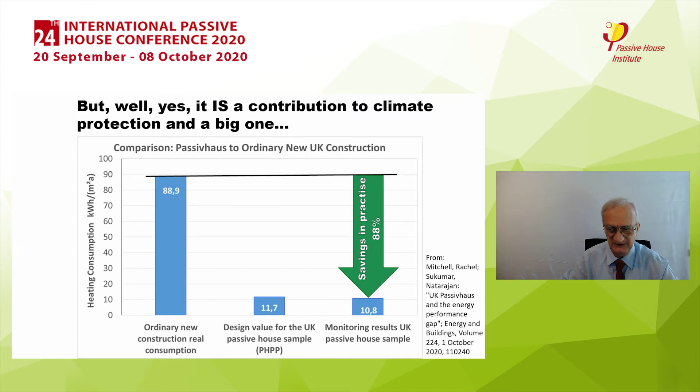This is not just a contribution to climate protection, but of course it is a big one. As we see from one of the latest studies on the achievements of Passive House, it's about 90% reduction in the energy needs for a typical residential building. This is from the latest UK study, but if we look at the general results of a lot of passive houses built in past decades, we can see that compared to contemporary average consumption, the reduction in heating energy is more than 90%.

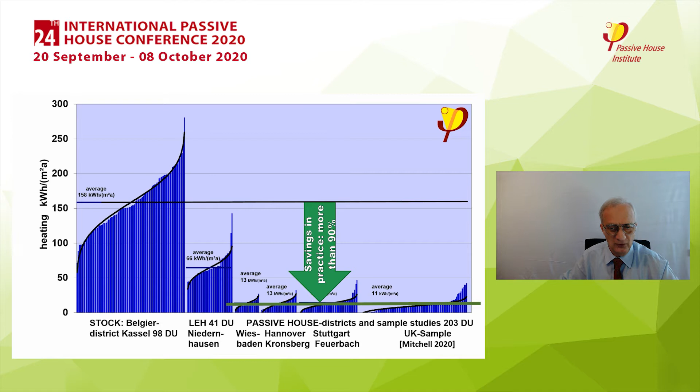And we have to keep in mind, heating contributes 30% of global energy consumption. So this is a huge reduction potential for energy and at the same time for the carbon dioxide emitted by using these furnaces for heating.

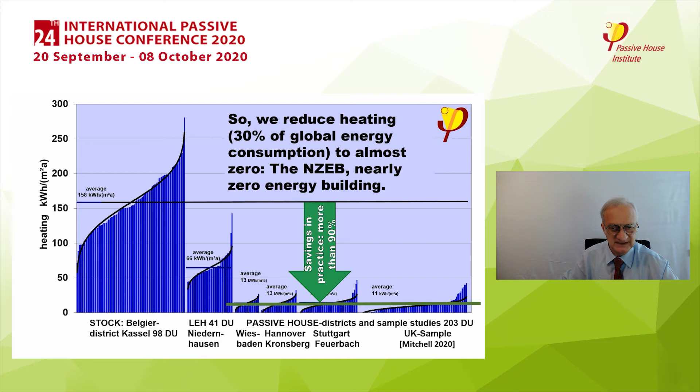Now, for a passive house, these demands for heating energy are quite low, so we can manage with a little bit of seasonal storage. But seasonal storage is something which is quite expensive, so we don't want to do much of this, and that will also be the case in the future.

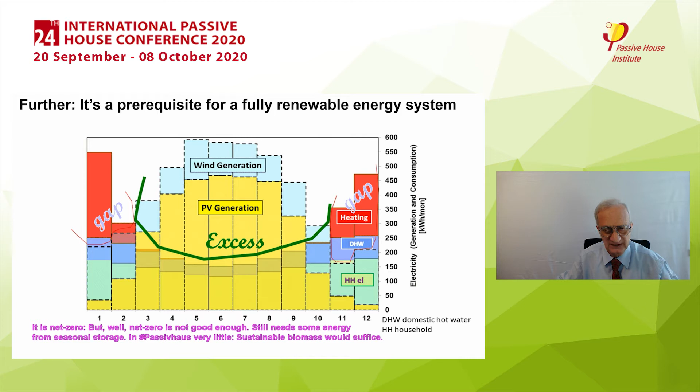So using passive house technology, we can improve the amount of energy efficiency we add to what we have already done in the past. That was quite a lot, but we can do even more so that the overall primary energy demand will not be increasing, but can be decreasing in the near future.

This is the additional efficiency we need when we add renewable energy, which can grow at least as fast as conventional energy production has grown in past decades, so that in a range of 2, 3, 4 decades, we can reduce all the fossil energy we need for the energy services in our houses, for our traffic, and for all the other purposes, which are of course also important.

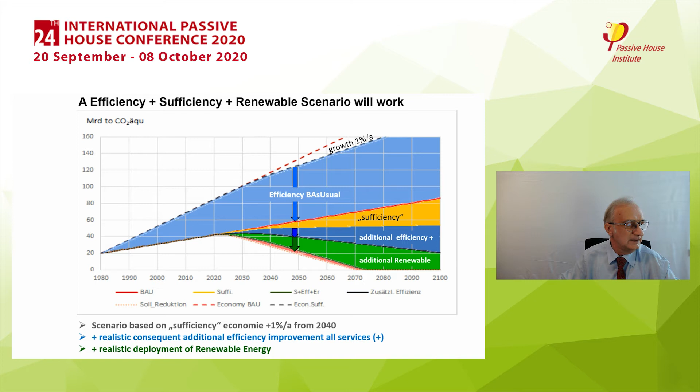So this is where I also have to look for the other advantages which a passive house will deliver for us. And first of all, if I'm sitting in my building, I want it to be healthy. So we want healthy living, and the passive house can deliver that.

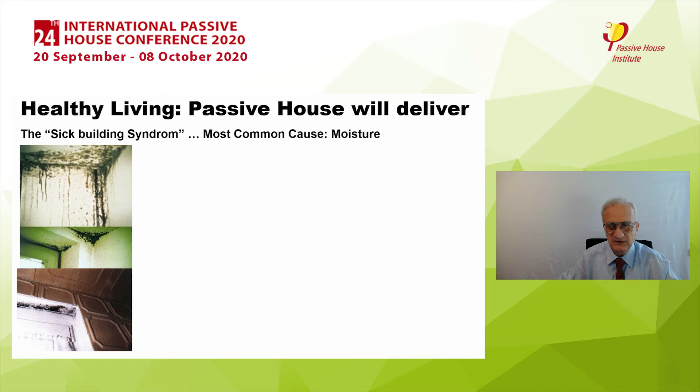If you look at buildings which are not healthy, like these ones, most of the causes for this are moisture problems. We don't want to have that in passive houses, and we won't.

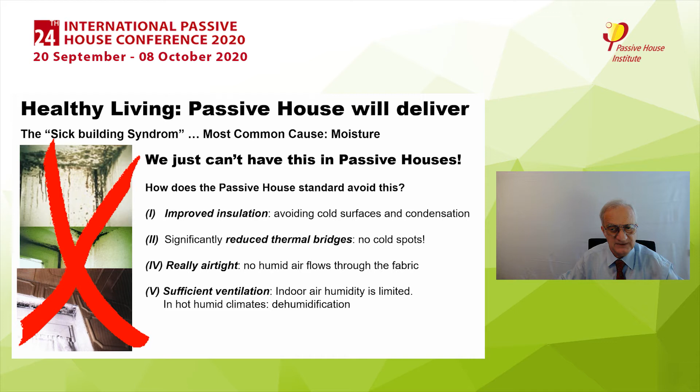Now, how does the passive house standard avoid this? Well, it has improved insulation, reduced thermal bridging, and it is really airtight, so there is no condensation in the gaps. And we have sufficient ventilation, which is very important with respect to indoor air quality.

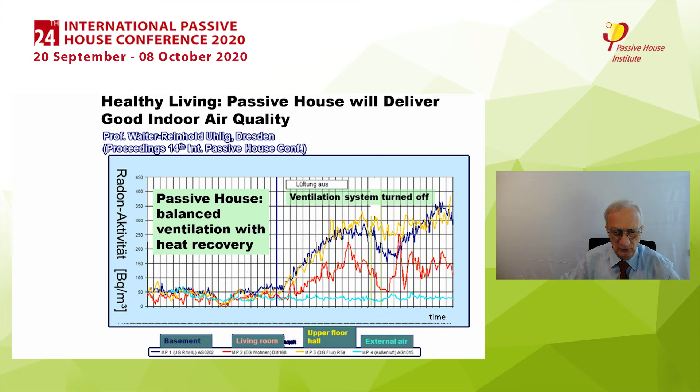This is also the case, of course, for all the other contaminants in buildings. In the past half year, we have all been confronted with the COVID-19 pandemic, and we now know that COVID-19 is also spread through aerosols. These aerosols are small particles in the air which can remain there for quite a long time; it takes about 3 hours to breathe just half of what was there before. So it's quite important to have fresh air all the time, and that is exactly what the passive house can deliver.

This is what we can see in schools, for example. Of course, we have to make sure everybody is also wearing a mask, because the big droplets, which might fly just a few meters and hit your face or surfaces, can't be ventilated out. You have to be protected from them by a mask. But if you're wearing a mask, the aerosol can be avoided by passive house ventilation, and this is what you see on that slide.

So we will reduce the overall chance of getting infected by more than a factor of 3, and that means that at the end the infection will die out because the reproduction rate will be smaller than 1.

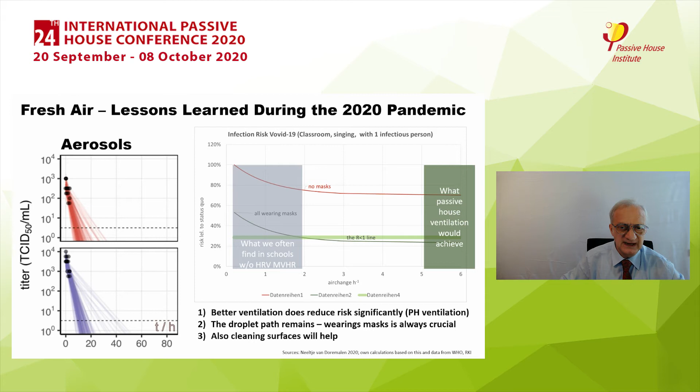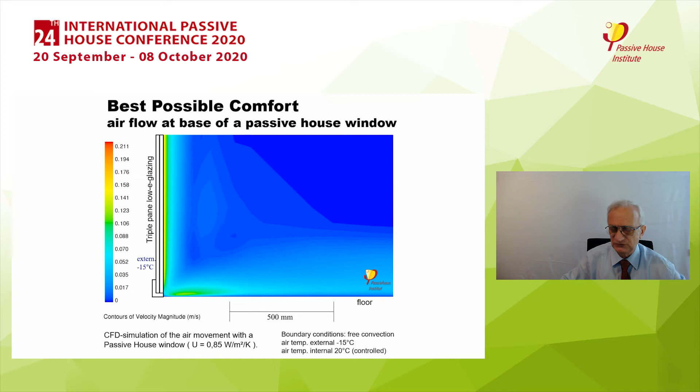So it's not just a healthy building, it's also a comfortable building, which the passive house will definitely be delivering. This is what you see on the next slide: the best possible comfort we can have. This is the cold draft which could come down from the window.

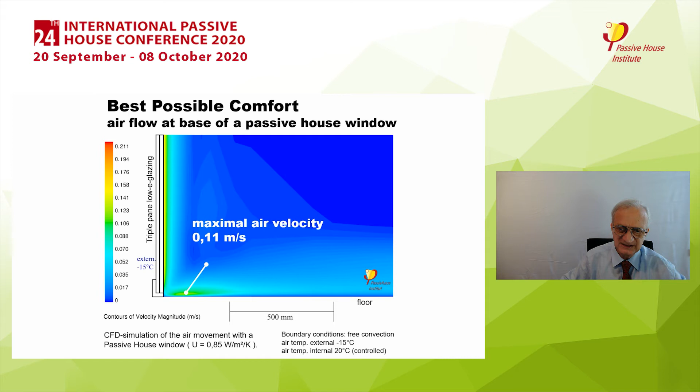In normal buildings, the velocities can be up to half a meter per second, and it could be quite cold air coming down there. In a passive house, we have very well insulating windows so that the surface temperatures are always above 17.5, 18 degrees.

You can also see this on this slide, where we see a visible picture on the left-hand side and a thermographic view on the right. With a single pane or double pane window, we still have cold window surfaces on the inside. But with the passive house window, the triple pane, double low-E window, the surface temperatures are above 17.5, 18 degrees. So at the end, there are no differences in radiation temperatures, no cold surfaces, and no downdraft at all.

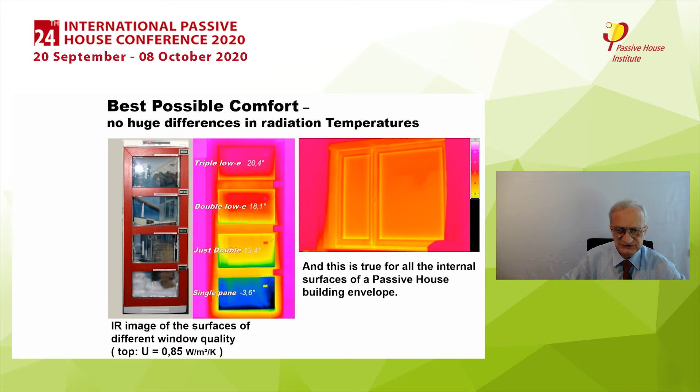This is also the case in the dwellings themselves. The surface temperatures of the external walls are even higher than that. We have structural protection by the air tightness, by being free of thermal bridges, by having relative humidities that can be guaranteed to be below 60%, by avoiding temperature stress in the construction.

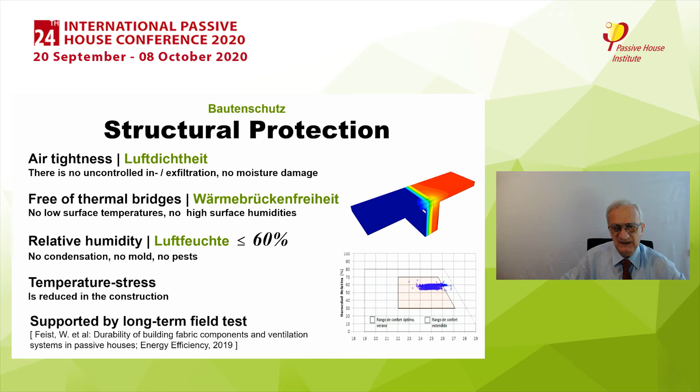And we have the corroboration of that by the long-term field test, which has just been published after looking into the data from 25 years of the passive house Darmstadt-Kranichstein, where we have done scientific research on how this building behaves right now.

The next quite important point is that the passive house can be affordable housing. To be a solution to mitigate climate change, it has to be affordable, because it's much too expensive otherwise—nobody will be able to do that in these 25 to 35 years we have for tackling climate change.

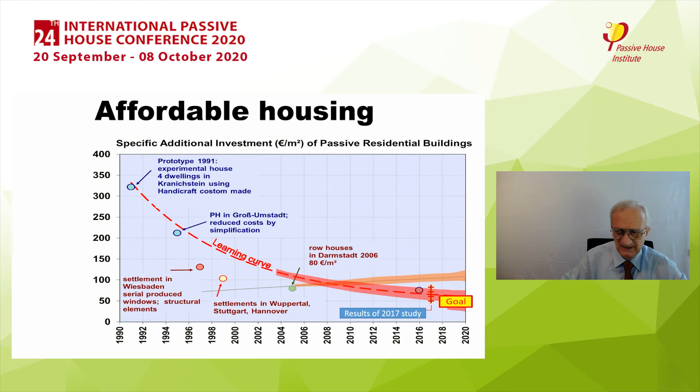So the passive house will pay back through the energy savings, even with a very low cost of fossil energy. And we already have built examples which show that this is not just theory, this is really working.

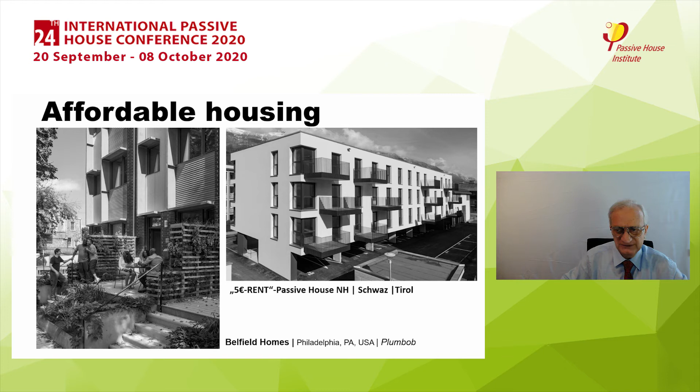We have feedback from a lot of places. This is from Australia, showing that the overall cost of living in a passive house, including all the advantages we have been talking about, will be lower than the costs in ordinary buildings. We will also see this in some of the presentations given at this conference.

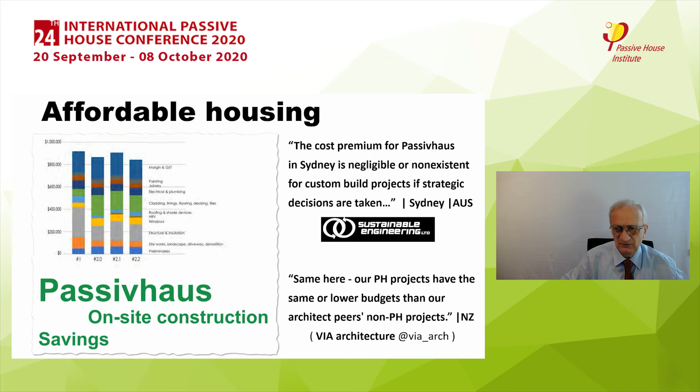This is important because if the heating costs are lower than €300 or dollars per year, it means that the energy costs for the passive house component investment are in a range between 0 and 6 cents per kilowatt hour. This is much cheaper than any kind of final energy you can have from whatever source you want—even less expensive than cheap fossil fuel energy.

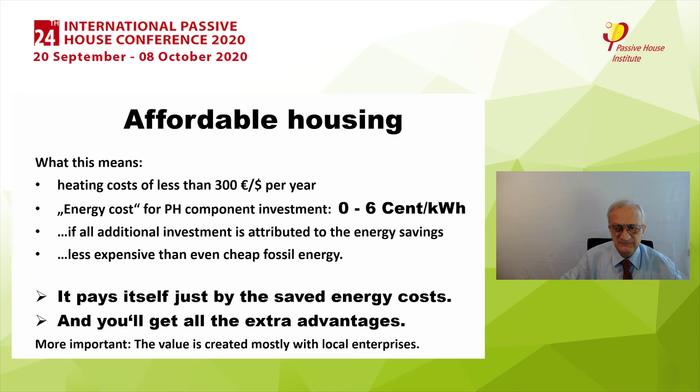So the passive house pays for itself just through the saved energy costs, and you get all the other advantages we have been talking about. What's even more important is that there's value created by building passive houses or by doing EnerPHit retrofits, and this value is mainly created with local enterprises. This is the next thing I'm going to speak about.

So this is a contribution to sustainability, and it's mitigating climate change. We have the problem of extinction of natural species. We have the danger of global wars, especially waged with nuclear or biological weapons. We have water pollution. And we have a shortage of certain rare earth elements.

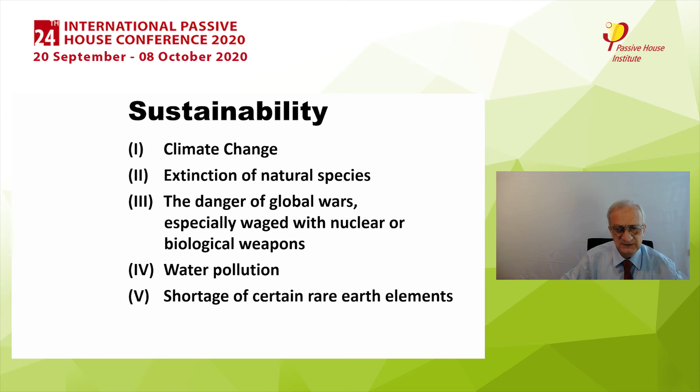In the contribution to the proceedings, I will come back to these topics with respect to some of our examples at the conference. Passive houses also have quite high resilience with respect to the climate change which will already occur in the near future.

What you see here is the final energy demand over several months in a passive house. Red is the heating, green is the domestic electricity, blue is the domestic hot water, and there's this blue part for cooling, like we have nowadays in not very hot climates.

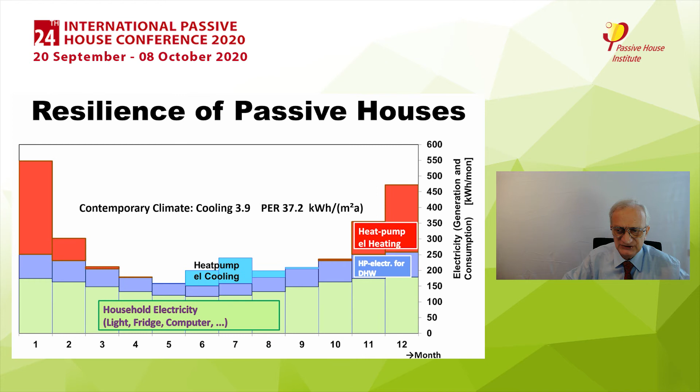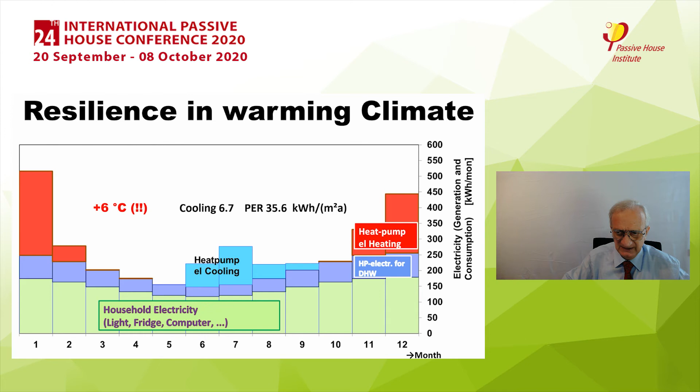But now if the climate is changing, there will of course be an increase in the cooling energy—this is what you see here. On the other side, there's a reduction in heating energy, so that the overall primary energy demand will be even a little bit less than it was before. So the passive house can also work in a warming climate.

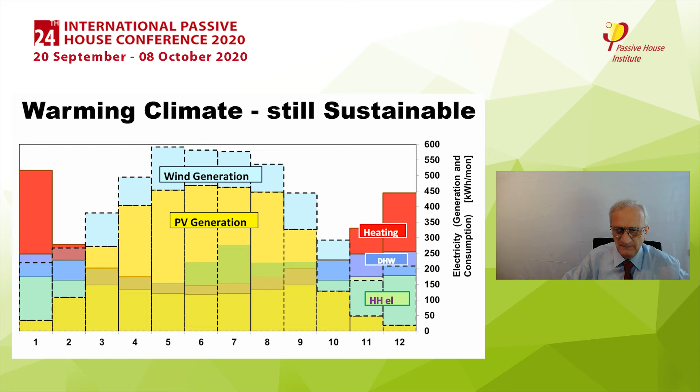If you look at the contribution of solar energy, this is the yellow part—you see that all that extra cooling energy is well within what can be delivered by the photovoltaic system, which can be mounted at the passive house itself. So it will still be sustainable even in a changed climate.

We will have to look into the topic of embodied energy and embodied carbon. The Passive House Institute has research going on this topic. It will be published at the end of this year and also next year, where we will give a method to look into this topic with scientific rigor. And we will see that there is indeed an additional contribution from using materials, especially natural grown materials, if you use natural grown materials for insulation. It will even add another contribution to the reduction of climate gases if we do it in a consequent manner.

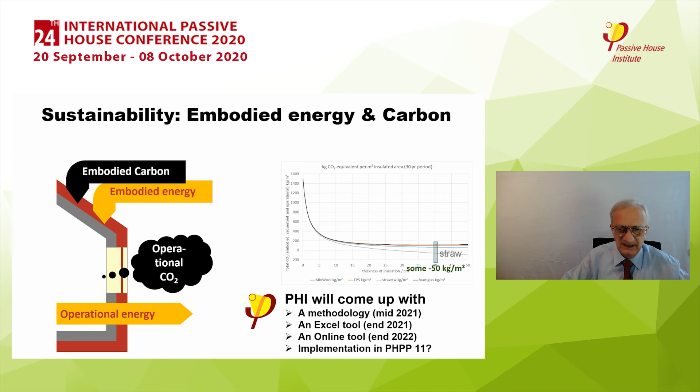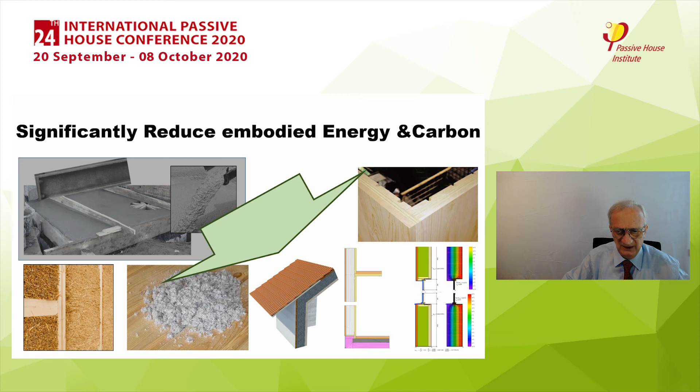That's also already available on the market right now. So if we change from conventional building materials to natural grown materials like straw or cellulose for insulation, like wooden panels for construction, we can even have some of the carbon captured in the structure of a building, and that will add to the energy savings and the carbon savings we achieve through highly energy efficient construction.

This is also already being done. We have examples of these types of developments: wooden windows, wooden construction, straw insulation in buildings.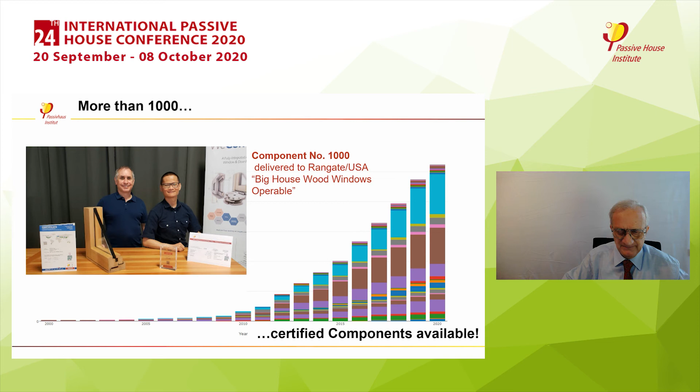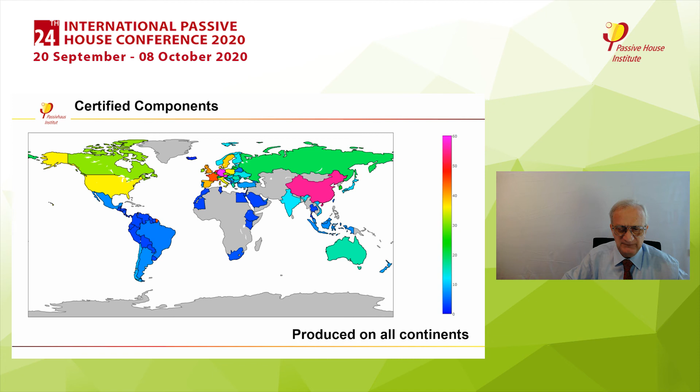We now have more than 1,000 passive house components available on the market worldwide. They are being produced everywhere on the planet. There is no continent where there is not production of passive house components. This is what can be done with passive house components—they can be produced everywhere on the planet. So we have these examples of local production, which is also a quite important step for sustainability in the future.

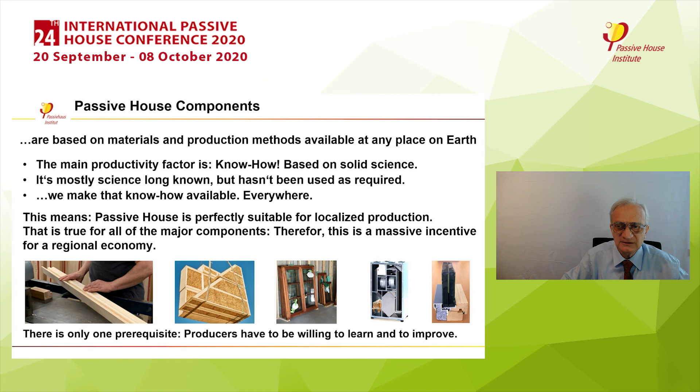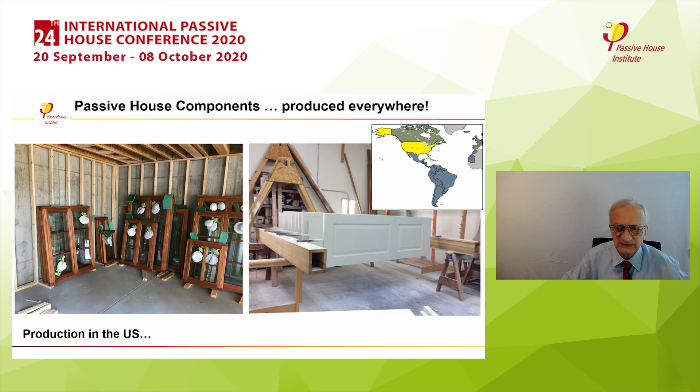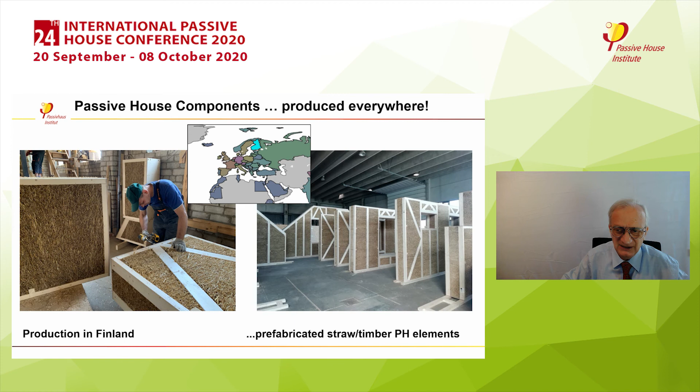This means local employment. The materials we need are available everywhere. The labor is available everywhere. It's not that difficult—you can learn how to do this. So this is being done everywhere: we have production in Germany, in Wales, in the United States of America, in Latvia, in Finland with straw bale construction you see here, in Japan and in China, of course. And there's also installation in China.

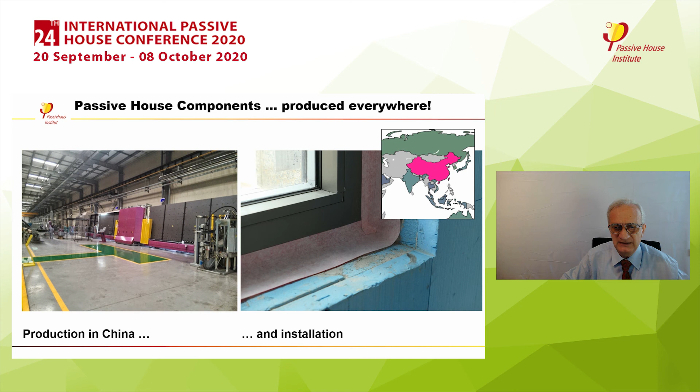This is quite important because in China we have a lot of new construction going on. It's important that construction at the end will be energy efficient, and there has been big progress made since our last Passive House conference, which took place in China, in order to deliver the knowledge to Chinese partners who can build passive houses and do passive house retrofits in China.

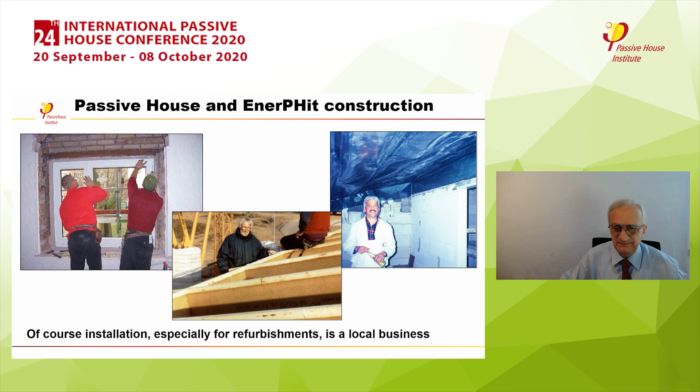Passive house and EnerPHit construction is of course always local—it's always a business which creates local employment. So passive house is a concept which is forward-looking, which gives us an example of globalization in a sustainable sense. It's not a material product, but the knowledge and know-how that is made available everywhere, so that production can be localized. That also gives us the possibility for participation in this development of science and of an open international society.

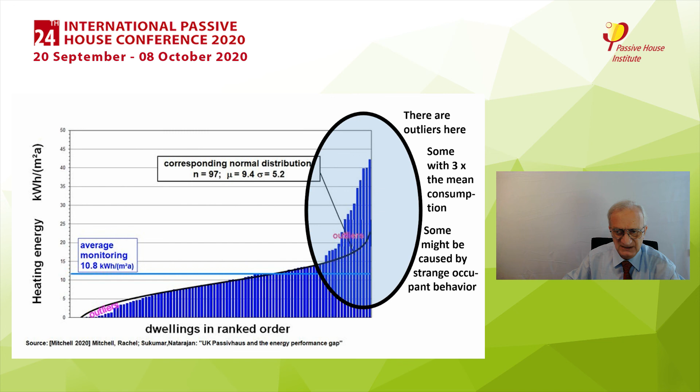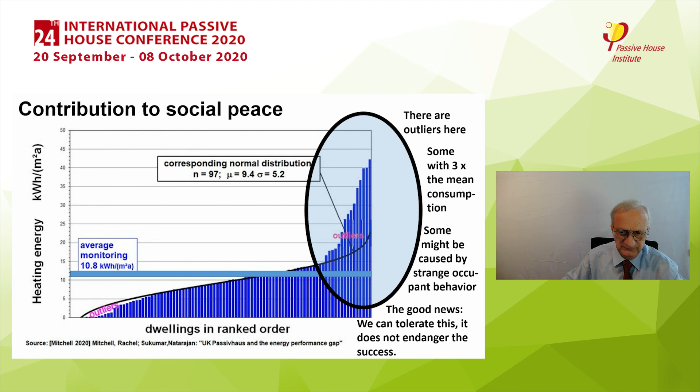Even looking at social sustainability, it's interesting to look at passive houses because we have a distribution of different consumption patterns, where people don't perform differently from what they do now. It's very difficult to change people's behavior. So you always have people who consume more than others, sometimes 2 or 3 times more. If you have very high overall consumption, that creates a problem. But if you have very low consumption, that double or triple consumption is not very high, so we can tolerate it. It's also a contribution to social peace, because passive house consumption is so low that even the higher consumers don't matter—they won't change the average much, and the average is the only thing important for sustainability, for whether we can deliver on the renewable energy side using the passive house principle.

So it's nice to see that almost anything goes. These are examples of built passive houses and EnerPHit refurbishments in the past years. And you see—it's everywhere on the planet, in all climates, in all architectural styles.

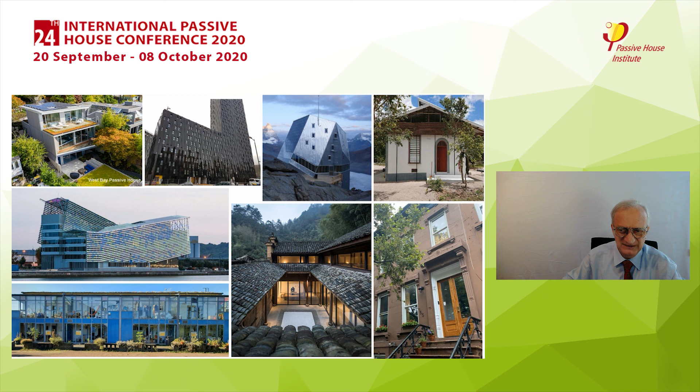It's all types of materials which can be used. It can be fully glassed buildings, old buildings in a traditional way, or really modern architecture. Everything works as long as the details are done in the way I have presented, as we will see in this conference. So from traditional to modern, from residential to schools, offices, even supermarkets—any use is possible. From concrete and steel to timber, all materials can be used. From Antarctica to Dubai, it can be built in any climate, and it can also be built in any culture because it does not conflict with the traditions of different cultures.

So Passive House, you've seen, is so much more than a contribution to climate protection. And I hope that this conference will help deliver on this topic. I wish you good information coming from this conference. Thank you so much for your attention.